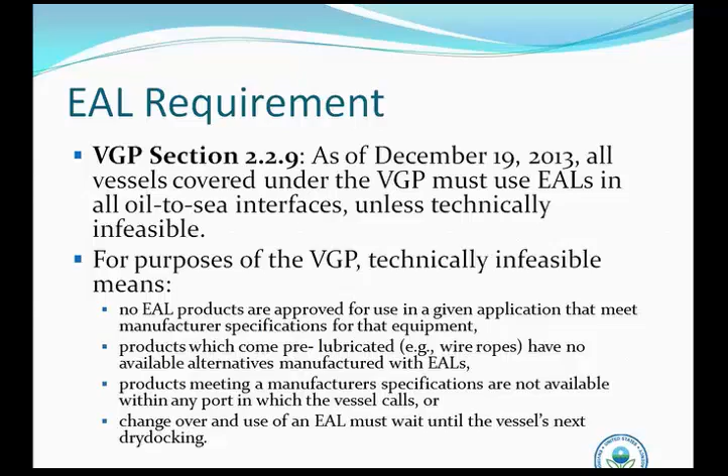So for the purposes of the VGP, technically infeasible means that there are no EAL products approved for use in a given application that meet the manufacturer's specifications for the equipment, or that products which come pre-lubricated, such as wire ropes, have no available alternatives using an EAL, or products meeting the manufacturer's specification are not available within a port in which the vessel calls, or that the changeover of an EAL must wait until the vessel's dry dock.

Really, the intent of this requirement is to reduce the environmental impact of lubricant discharges on the aquatic ecosystem by increasing the use of EALs for vessels operating within waters of the U.S.

So what is an EAL? An EAL is a lubricant that is biodegradable, minimally toxic, and not bioaccumulative. And all of these are defined in Appendix A of the Vessel General Permit.

There are a number of products meeting the permit's definition of an EAL, included in some voluntary labeling programs, which we've listed here. For example, Blue Angel, European Eco Label, Nordic Swan, Swedish Standard, OSPAR, and as we mentioned before, EPA's Design for the Environment Program, which we'll get to a little bit later.

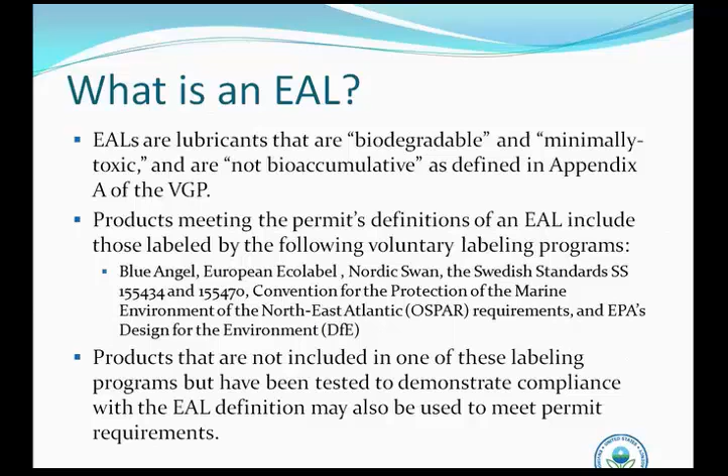Products that are not included in one of these labeling programs but have been tested to demonstrate compliance with the EAL definition are also able to be used, provided again that they meet the definitions that are described in the permit. Okay, next slide.

So what is an oil-to-sea interface? An oil-to-sea interface includes any mechanical or other equipment on board a vessel where seals or surfaces may release quantities of oil that are subject to immersion in a body of water.

In other words, it's equipment that's going to be coming in contact with water where there may be oil leaking into the water. We include a list of several onboard applications in the VGP, but there are also other applications that could apply. Generally, these are going to be things like controllable pitch propellers, thrusters, paddle wheel propulsion, stern tubes, wire ropes, and mechanical equipment subject to immersion.

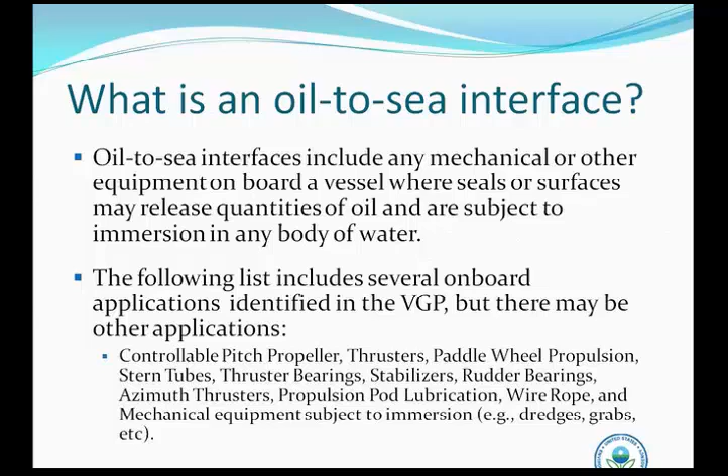We'll note vessel operators are not required to use an EAL on deck machinery so long as the equipment is not subject to immersion. In other words, it doesn't have an oil-to-sea interface. However, discharges from deck machinery are subject to other discharge requirements, such as those for deck washdown and runoff. This is a separate section of the permit under 2.2.1.

Okay, and for documentation and reporting, when you are using an EAL, it must be reported in your annual report, and documentation about the EAL must be kept as part of your record-keeping requirement. Again, intended to be pretty straightforward. When you're sending this to us in your annual report, we're looking for whether or not you're using a product from a labeling program, or if you're not using a labeled product, providing some information that the product meets the definition of an EAL. And that can come from any technical data sheet that shows it meets the definition, or an MSDS, something like that.

If you're unable to use an EAL, if you've determined that its use is technically infeasible, then the use of a non-EAL must be reported on your annual report, and documentation also kept as part of your record keeping for the vessel. Again, the documentation is intended to be simple, basic, and straightforward, and should include information on why the use was determined to be technically infeasible. For example, a general statement from a seal manufacturer can be used as sufficient documentation, or information, for example, if you have to wait until your next dry dock to install the new seal.

One thing to note, we are in the process of building our annual report system where you would submit this information to EPA, and that should be up in a few months. But the first annual report will be due to EPA in February of next year.

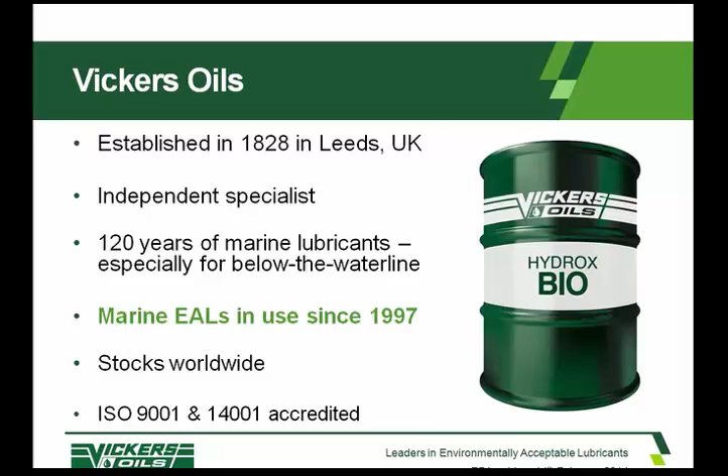We have four ranges of VGP-compliant EALs: stern tube and stabilizer bearing lubricants, hydraulic fluid, greases, and gear oils, primarily for thrusters. And importantly, we've now supplied approaching 2,000 vessels which have used our products since 1997. So we do have a lot of experience, both in terms of the number of vessels and the length of time in use.

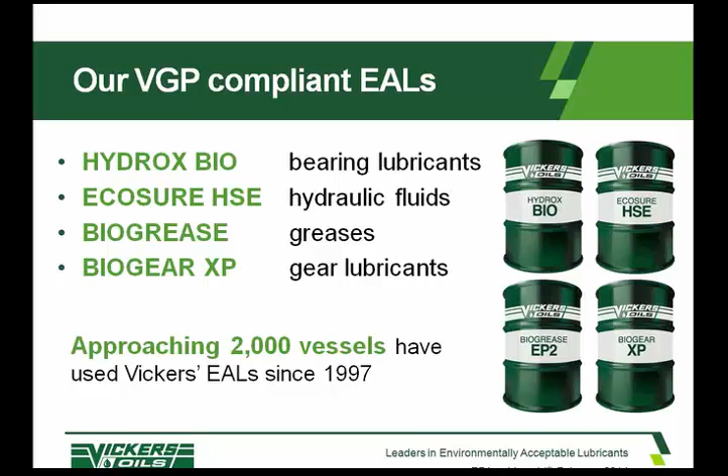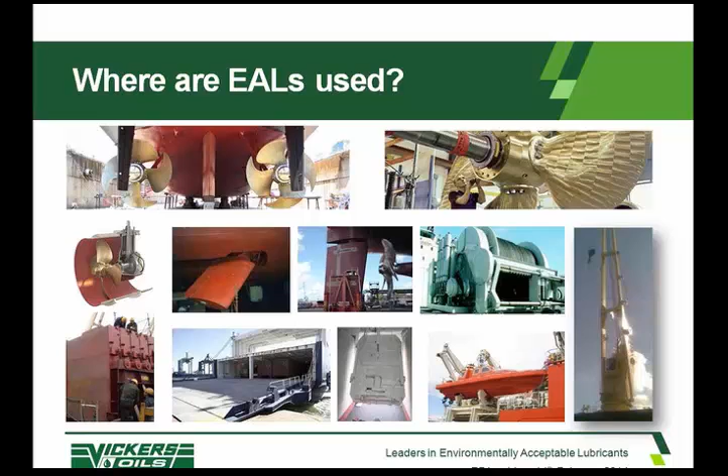This shows the main areas where our EALs are being used. The VGP-mandated applications are near the top of the slide: stern tubes, controllable pitch propellers, thrusters, stabilizers, and rudders. And as we heard, the VGP also recommends the use of EALs in other applications on deck or in the hull.

The VGP has already generated a substantial increase in demand for EALs from customers worldwide. Since last summer, we've seen a huge number of inquiries for information, as well as a surge in orders for both new builds and dry dockings. And in general, most users are well aware of the VGP requirements and are seeking to comply with them.

But there has been some confusion about the grounds for claims of technical infeasibility among both users and equipment makers. We have advised all parties not to rush into hasty decisions. It will be a gradual process to introduce these products and make sure that changeover is done properly. We've been preparing detailed recommendations for customers, considering each vessel in turn and evaluating each application separately.

So I want to turn now to those grounds for technical infeasibility, looking first at equipment maker approvals. Next slide, please.

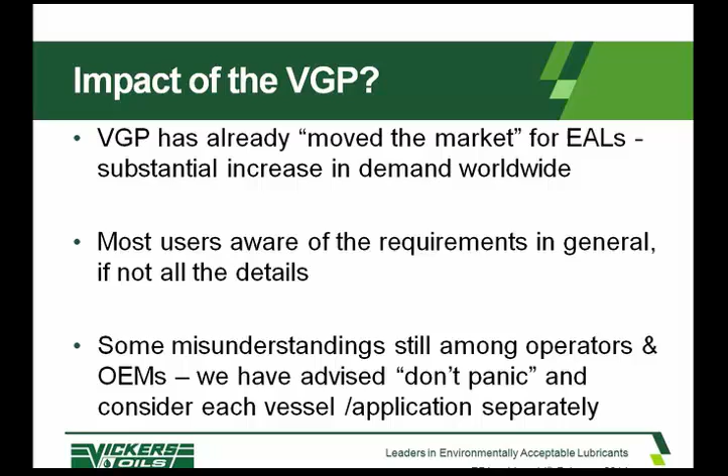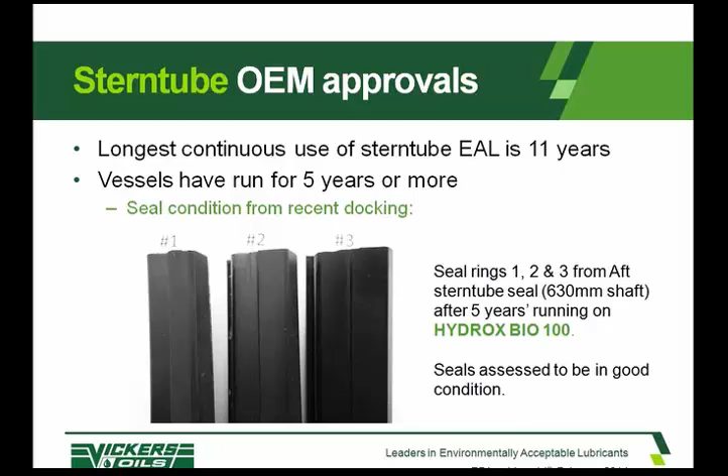As I'm sure we'll hear later from Pirjetta, stern tube seal makers have conducted a great deal of research and testing to ensure their seals are compatible with EALs and to determine the conditions under which they can accept the use of EALs for 5-year intervals. In light of their own testing, and after inspecting the actual condition of seals after several years' use, some stern tube seal makers are reducing their previous restrictions on the use of EALs. Others are introducing new elastomer seal materials with improved compatibility to EALs. So overall, for most conventional stern tube seal designs, it is now technically feasible to use EALs, provided that the appropriate elastomer type as specified by the seal maker is used. And Vickers Hydrox Bio is approved by all the major stern tube seal makers. And just a caveat for this and all applications, you should always confirm the detailed approval status and recommendations, both with the equipment manufacturer and with the EAL supplier.

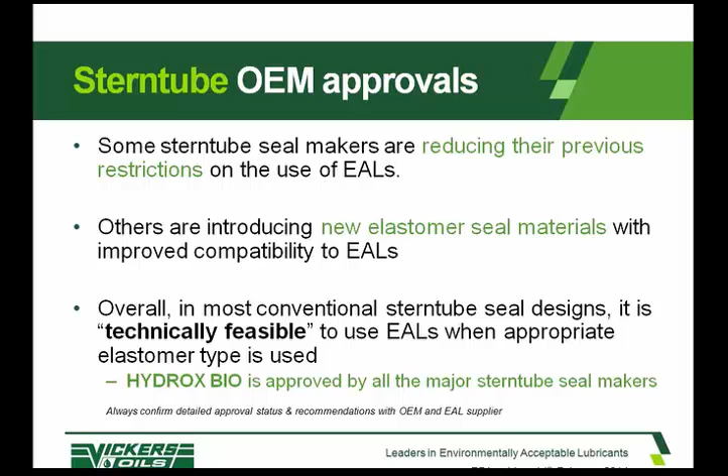Another major area of interest for customers has been grease. There are certain VGP applications, such as some CPP designs, some stabilizers, and in particular some rudder bearings, which are grease lubricated and where equipment maker approvals are required. Vickers BioGrease EP2 has gained such approvals, so its use is technically feasible in those applications. In some other applications, such as re-greasing wire ropes, OEM approvals are generally not required.

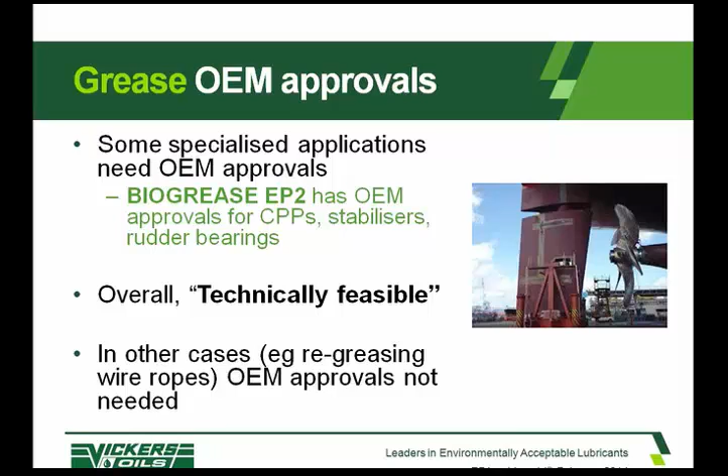The picture for controllable pitch propellers is a little more complicated, partly because the designs vary quite widely, and different designs, even from the same manufacturer, can require different types of lubricant. But some CP manufacturers have already given full approval to one or more EALs, including our EcoSure HSE. Other CPP manufacturers are still testing EALs or doing a desk evaluation. So overall, it is technically feasible to use EALs in many types of CPP, but you should always check the precise details and recommendations for each case.

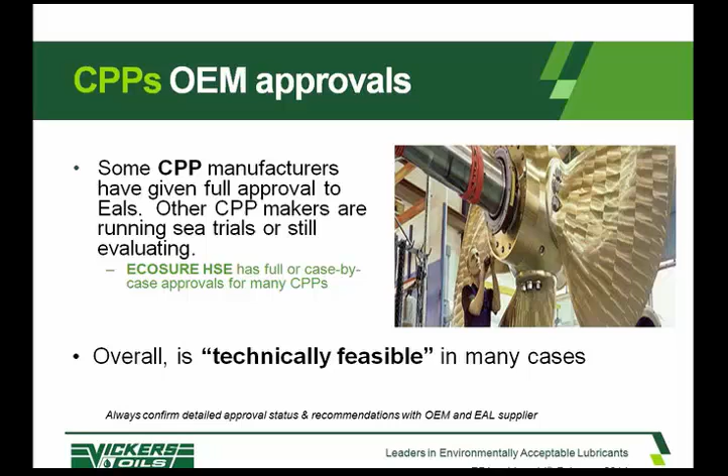Fin stabilizer manufacturers have been aware of customer demand for EALs for several years, so there are some long-established reference users. As most stabilizer manufacturers have now approved one or more EALs, overall their use is technically feasible, dependent on the model design and conditional on the installation of appropriate seals.

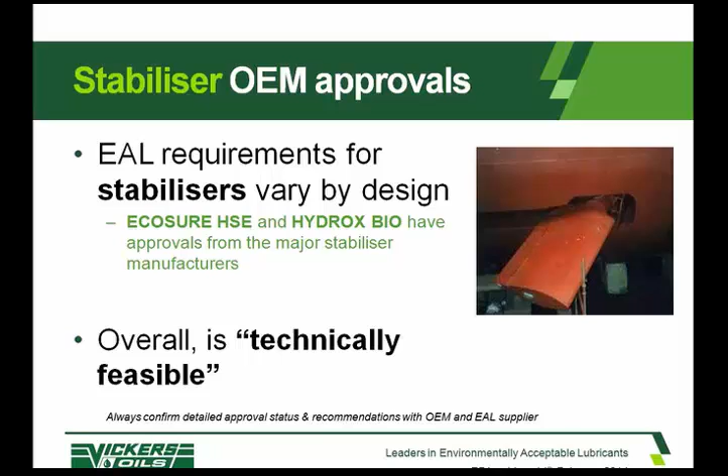However, thruster makers are generally taking a much more cautious approach. We think that's entirely right. There are very few, if any, thruster units which have yet run on EALs for 5 years. Thrusters are critical pieces of equipment, and risks should not be taken. That said, all the thruster makers have programs to evaluate and test EALs, and some have been running trials for a while. Our own product has been in multiple OEM supervised trials since 2009. But several thruster makers have issued letters stating that the use of EALs is at present technically infeasible.

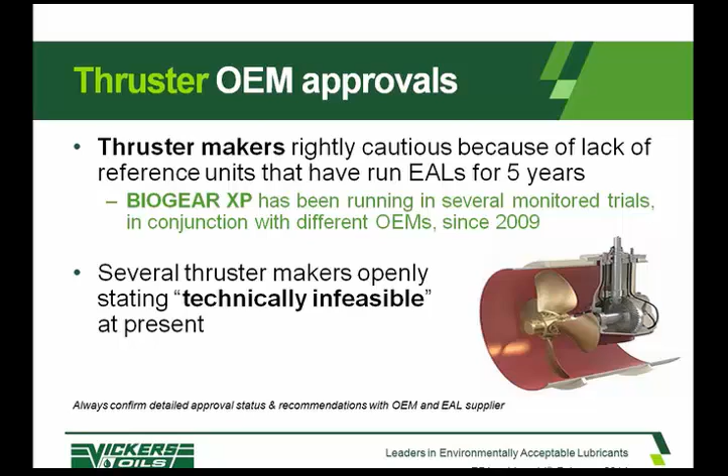Moving on to the second area of technical infeasibility, which is availability of product - an issue, of course, not just in the US but worldwide. Vickers is holding increased levels of inventory at key ports globally in response to the great increase in demand. And we believe that new market entrants will, over time, further widen product availability. So lack of availability should not routinely be a reason to claim technical infeasibility.

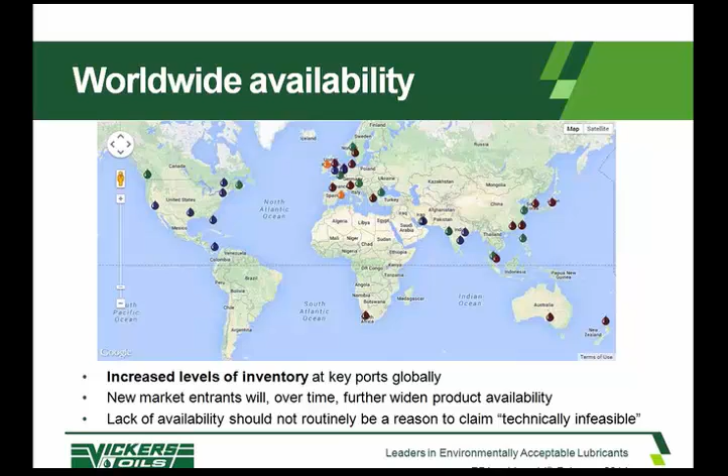The third ground for technical infeasibility is about changeover requirements and the need for dry docking. Vickers, in line with most equipment makers, recommends that changing over to EALs should happen in dry dock for below-the-waterline applications, in order to ensure you start with a clean, intact system, that EAL-compatible seals are fitted, and so as to minimize the carryover of the previous lubricant. But some above-deck grease applications can be changed at sea, provided that the existing grease is compatible with the new EAL grease. Next slide, please.

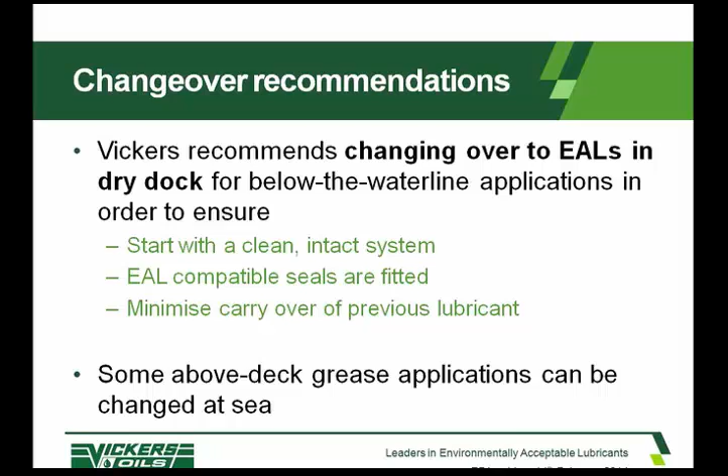Based on our experience with marine EALs over the last 17 years, we believe their successful use relies on a three-way cooperation between the equipment maker, the EAL supplier, and the customer. Each has an individual responsibility. The equipment maker can ensure that EAL-compatible seals, paints, and other components are fitted. The EAL formulator should use its expertise to ensure environmental demands are balanced with performance requirements. And the customer must maintain the EAL properly once it's in use. EALs are premium products and should be properly cared for. In particular, customers should pay attention to the instructions for use issued by the equipment maker and the EAL supplier, and should use an oil condition monitoring service designed for EALs, and of course should then follow the advice given in those reports.

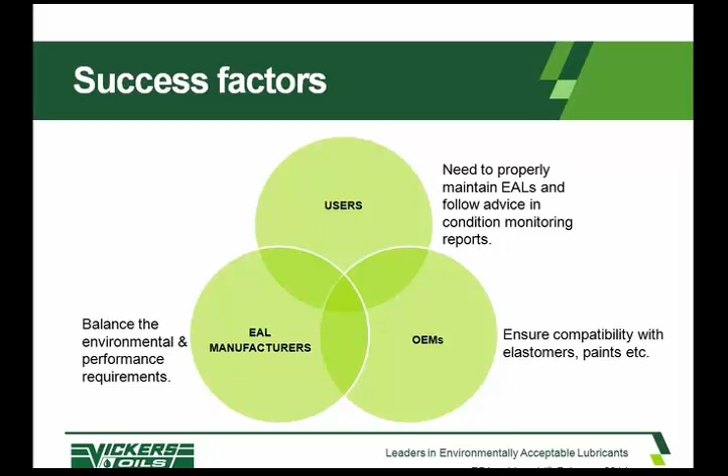So in summary, the use of VGP-compliant EALs is now technically feasible in many applications. Marine EALs have been proven in practice. They're compatible with system components and are approved by OEMs. They're readily available worldwide, and they're making a real contribution to minimizing the environmental impact of shipping.

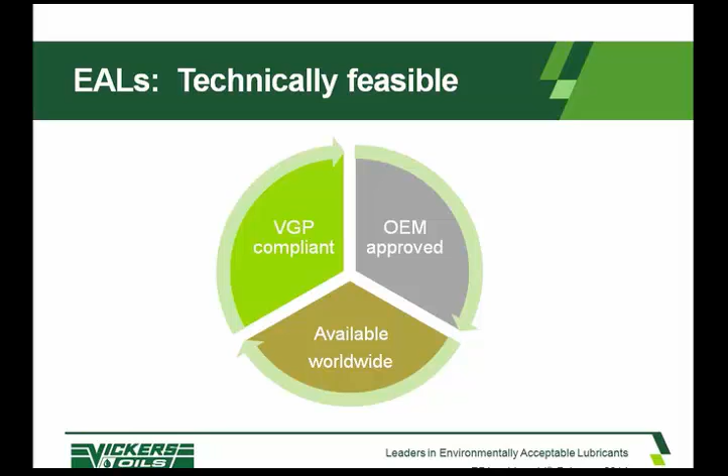If you'd like any further information, please see the dedicated VGP page on our website or contact us if you have any questions. Thank you very much for your attention.

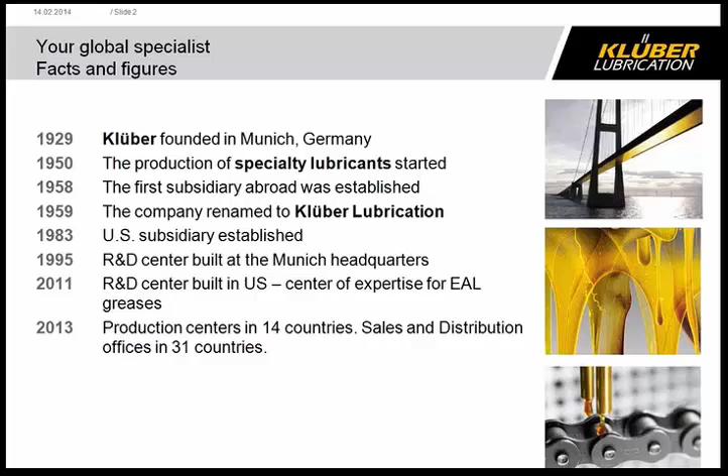So we have 2 R&D centers now, one in Munich, which has an extensive test bay for sophisticated testing of lubricants, and we've just created a second R&D center here in the U.S. where we will focus mostly on EAL greases to meet the needs of the VGP. We currently have production centers in 14 countries and sales and distribution offices in many countries. Right now, we service over 25 defined market segments with 3,000 different products. The marine industry is one of our market segments.

2 of the components of our strategy are research and development and a direct sales force. Of our worldwide employees, at almost 2,000 employees, 8% of the workforce is working in R&D, and about 50% of the workforce is working directly with the customers to solve their issues.

So for EALs, what is the Klüber offering? It essentially follows the same strategy that we've done with all the other industries. We work closely with manufacturers of the equipment to design specialty lubricants that meet or exceed the manufacturer's specification, with the purpose of maximizing the investment that the ship owner has made in their equipment.

Since the release of the vessel general permit and the requirement for OEM approvals, we've been working very closely with the OEMs on having approvals for our products. Thirdly, we do believe that the Eco-Label or EPA Design for the Environment or one of the other certification programs provide a third-party classification system that assures the customer that our products are VGP compliant.

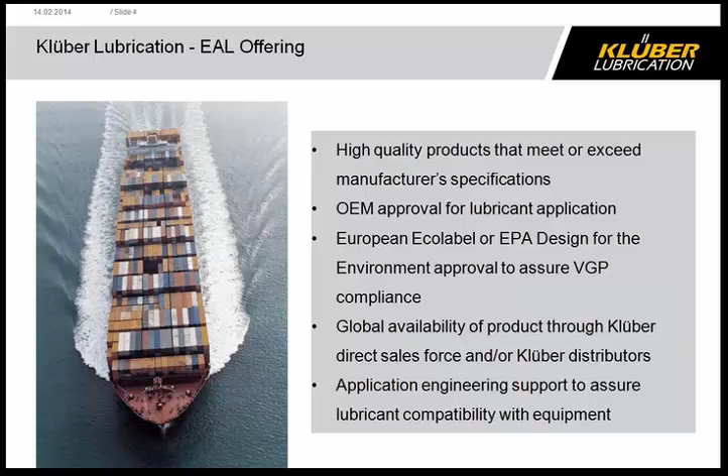All of our oils and hydraulic oils are certified by the EU Eco-Label, and our grease that I'll talk about is under review by the Design for the Environment. We do have global availability through our direct sales force and/or Klüber distributors. Finally, our value offering includes engineering support from our direct sales force.

The current Klüber portfolio for EAL products includes stern tube oils, thruster gear oils, hydraulic fluids, and a new product that we've just released focused on wire rope and open gears. In describing each of these products, we use the highest quality ingredients to get the best performance out of the lubricant. Our stern tube oil and thruster gear oils use high quality ester oils as the base oil, which are highly resistant to hydrolysis and other issues that would degrade the oil.

Our gear oil is formulated to protect gears against pitting and wear. Our hydraulic fluids pass all of the standard hydraulic fluid tests, and they have very good low temperature capabilities. All three of those product lines are approved or certified by the EU Eco-Label.

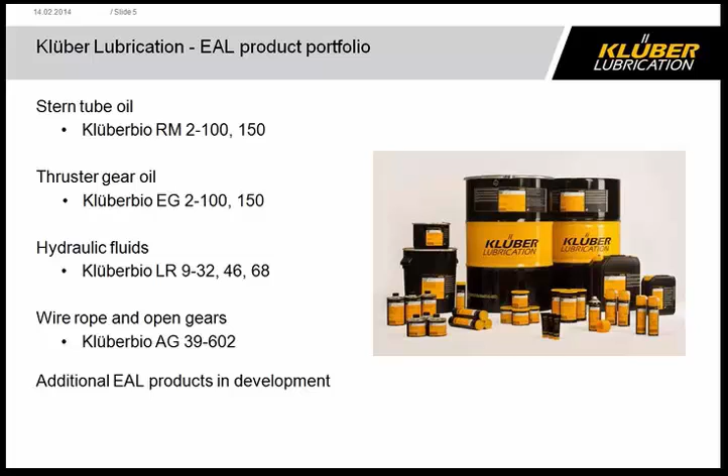The wire rope and open gear grease that we've just launched provides the customer with an excellent wire rope product that has excellent adhesion and corrosion protection. On open gears, such as jack-up legs, it has great anti-wear properties. But as mentioned, we do have additional EAL products in development, following our strategy of looking at specific applications on the vessel and developing a grease that would maximize the life of that product or piece of equipment.

So from our point of view, how is the transition to EALs going? Well, the first thing I would say is that it really is following the path that the EPA envisioned, and that it's a gradual transition. From my understanding, there was no requirement to transition over to EALs quickly. The need to transition really should follow the safety of the vessel and the OEM approvals.

So customers are taking advantage of this transition period. They're looking at their dry dock schedules and their OEM approvals to come up with a plan to transition their vessels. But I've also noticed they're using this time to educate themselves on the products and on the VGP requirements. When I first started talking to customers a year and a half or two years ago, there was very little understanding of what the VGP requirements were, and that has changed dramatically.

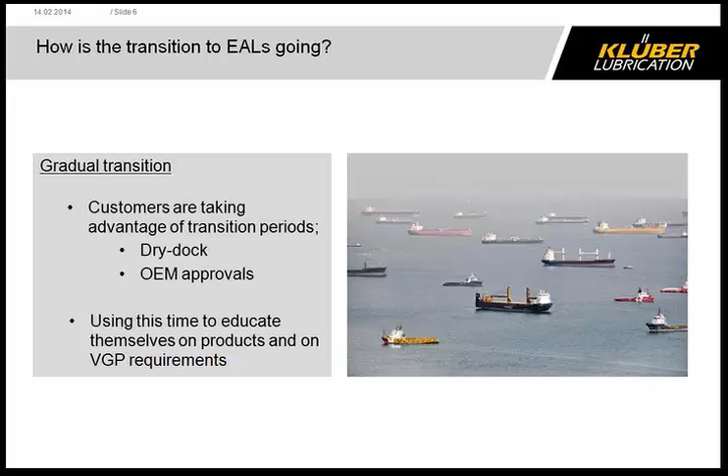The other thing that's changed dramatically is the people I'm talking to. A year and a half ago, I would have been talking to the compliance people within each of the companies, and now that has moved much more into the operations of the vessels. So we've seen a transition of knowledge to the operators and out onto the vessels.

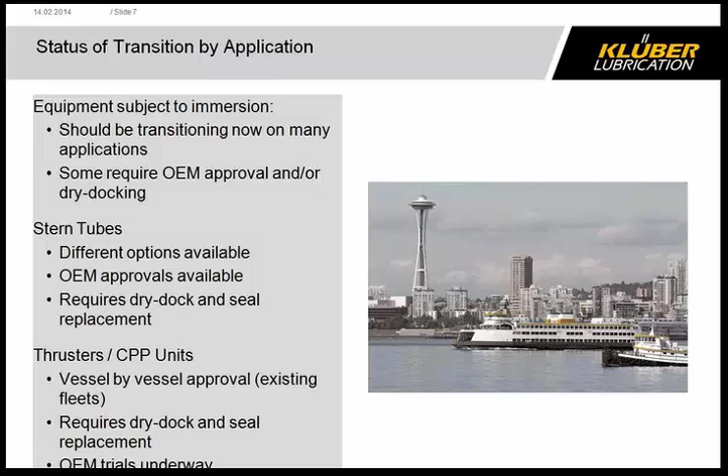The thrusters, as previously mentioned, and the CPP units are a different story. There's a real need to test the products available to make sure they meet the requirements of the thruster units. The load on thrusters is quite a bit higher than on a propeller shaft, so there's a need to put these products into trial and determine which will meet the long-term requirements of the thruster manufacturers. There are many OEM trials underway, and we're taking part in some of those. We do have some initial approvals, but for the most part, customers are relying on letters of non-feasibility in the short term.

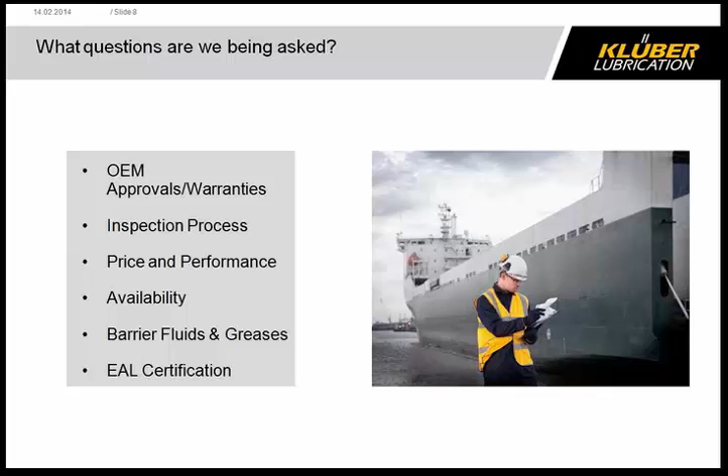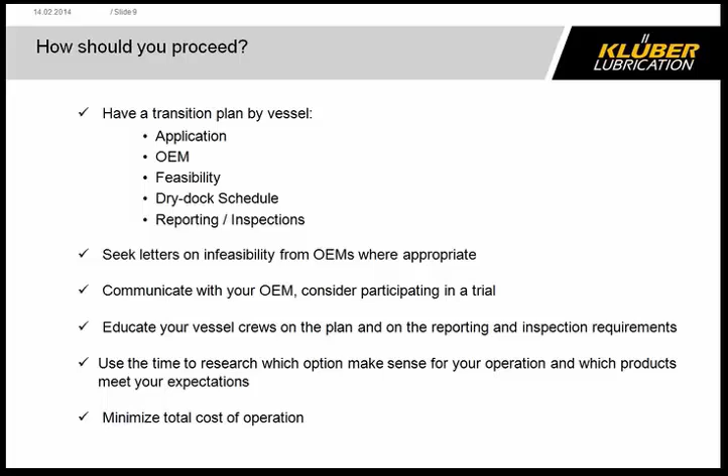Consider participating in a trial. There may be savings for you, and OEMs are looking for opportunities to conduct trials. Educate your vessels and crews on the plan, since they're the ones talking to the Coast Guard during inspections, and use this time to research the options that make sense for your operations and which products meet your expectations. Lastly, as you do your analysis, look to minimize the total cost of operation over the equipment's lifespan.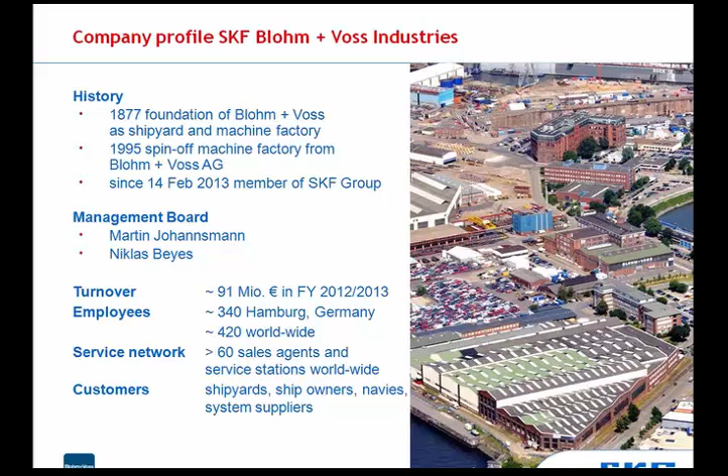When we talk about VGP 2013, we focus on the stern tube components and how the new rules affect our seal technologies. With the new VGP rules, it becomes mandatory to use EALs at all oil-to-sea interfaces unless technically infeasible. We offer technologies to fulfill the stringent EPA requirements and protect the ship with its crew. Let's start, next slide please.

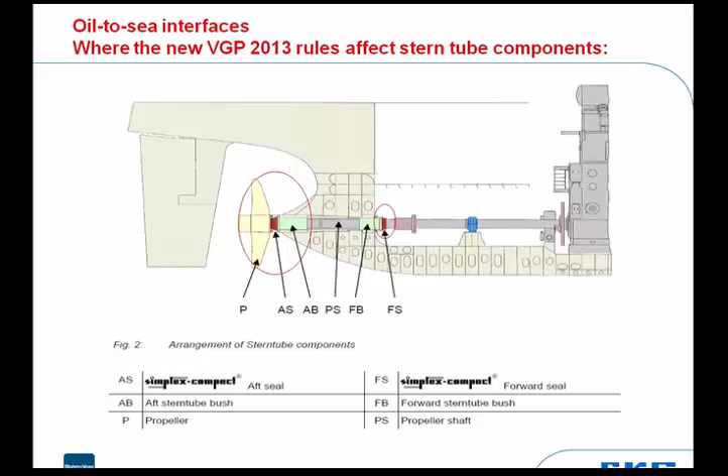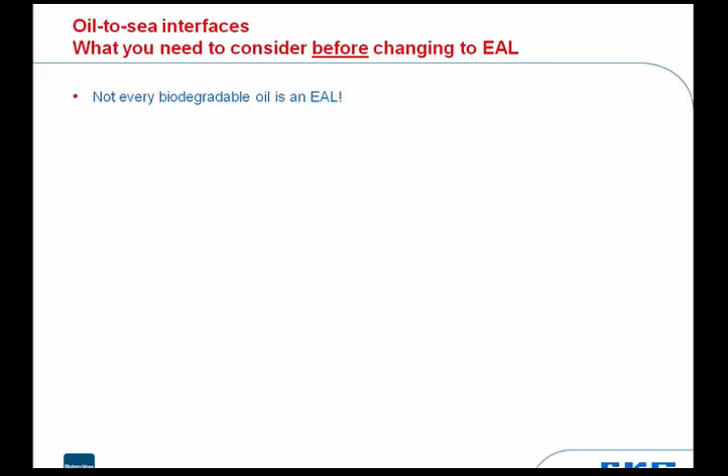First, let's look at what you have to consider before changing to an EAL. We already learned that not every biodegradable oil is an EAL. The problem is that biodegradable oils or EALs can chemically affect the sealing rings, especially through hydrolysis. This means the lifetime of the seal ring material decreases, and we risk having shorter dry docking periods, even less than 5 years, with a risk of sealing failure. Biodegradable lubricants are not suitable for all sealing ring materials, and that is very important.

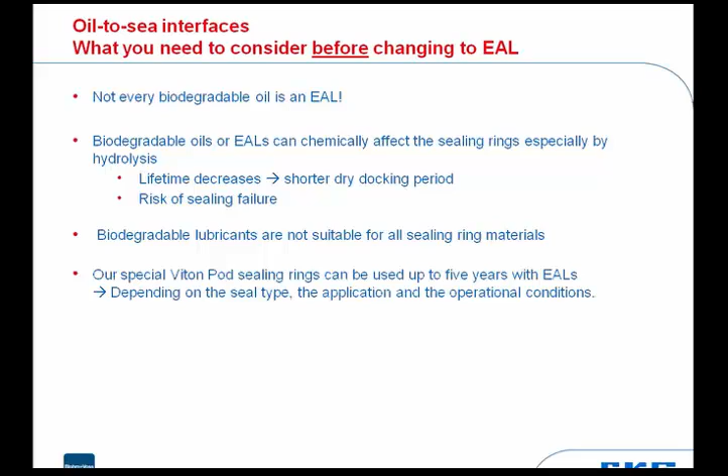But we provide a special Viton Pod sealing ring material, and this material is compatible with EAL. We have gained experience for more than 10 years with this special material in the market, and we can use it up to 5 years with EALs. This depends, of course, on the seal type, the application, and also the operational conditions.

Before using an EAL, it's very important to check if it's approved by us. We have a big R&D department who carries out extensive tests for all the given applications, and you can find the results on our latest EAL list on our website. We will update this continuously because the number of EALs is also increasing.

Last, very important point is also that you have to avoid intermixing different oil types because of unpredictable chemical effects on the sealing ring materials. So you cannot use one sealing ring material and switch between the oils. This has to be checked also with your oil suppliers and/or with the shipyard on how the switchover can be done. So we've seen in Peter's and Ben's presentation that it should probably be done during dry dock.

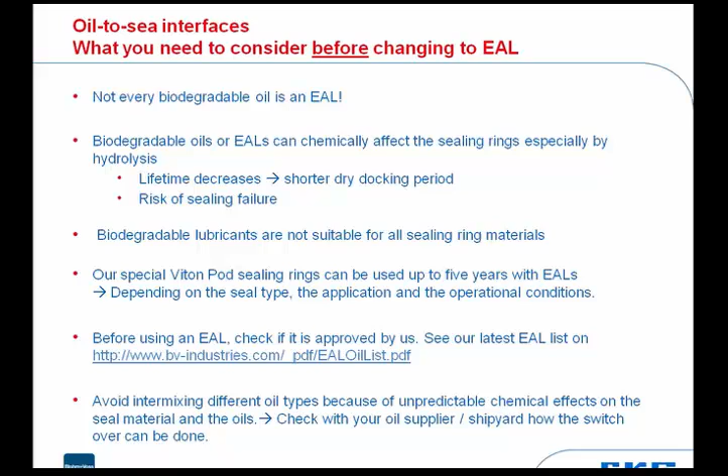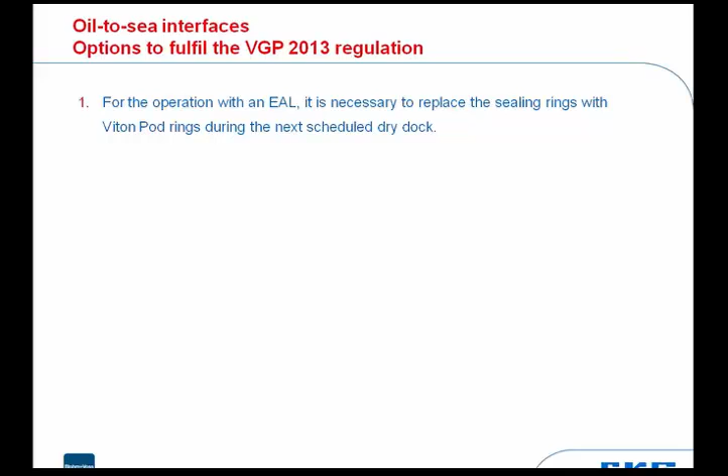In general, there are two options on how to fulfill the VGP 2013 regulation. For operation with an EAL, it is necessary to replace the sealing rings with our special Viton Pod rings during the next scheduled dry dock. In addition, we can issue a statement that the existing simplex seal is technically infeasible with the use of EAL. This statement you have to keep on board starting from last December, and it is also part of the annual report to the EPA.

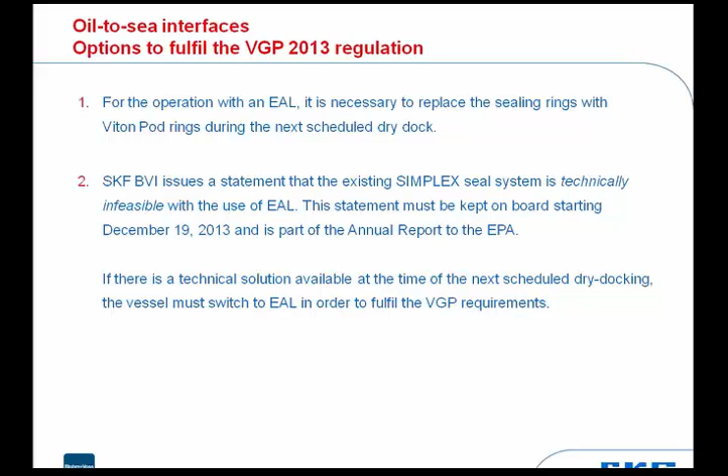Important is that if there is a technical solution available at the time of the next scheduled dry dock, the vessel must switch to EAL in order to fulfill the VGP requirements. Next, please.

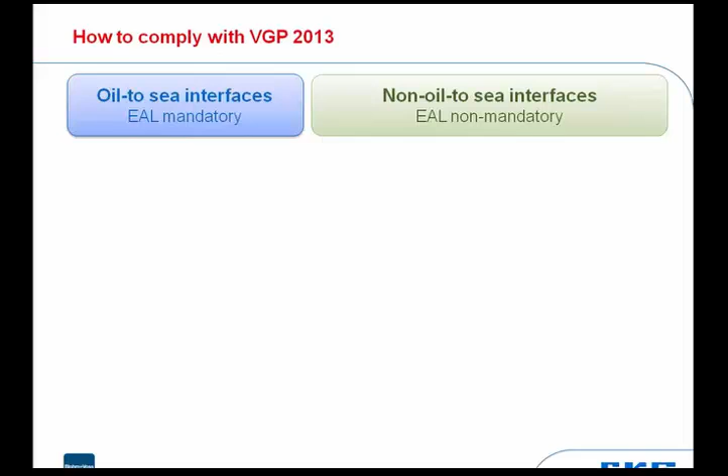Now let's talk about some detailed sealing technologies and how to comply with VGP 2013. I would like to start with the oil-to-sea interfaces, then I'll move on to the non-oil-to-sea interfaces.

As you can see here on the slide, EAL is mandatory for all oil-to-sea interfaces, and the EPA requirements concern our conventional seals, but also in addition the cathodic protection. Here we offer a special sealing ring material, the Viton Pod, as well as an aluminium anode. Next, please.

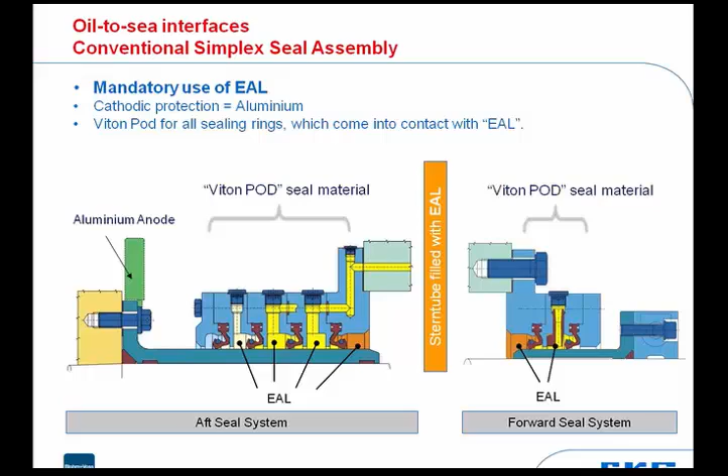As an illustration, I give you here a drawing of our conventional simplex seal assembly. You can see the use of EAL is mandatory for the conventional seal, and you have to select Viton Pod for all sealing rings which come into contact with EAL. Important to know, this doesn't only concern the aft seal, but also the forward seal. All sealing rings which come into contact with EAL have to be made of Viton Pod seal ring material. Next, please.

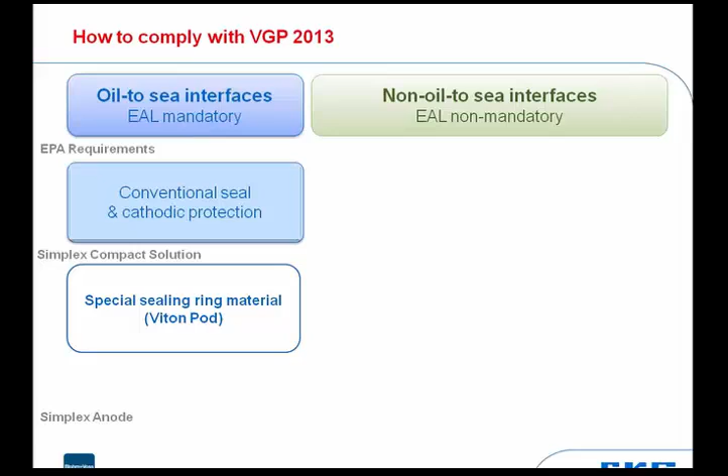Let me turn now to the non-oil-to-sea interfaces. So non-pollution air seals, which fully eliminate any oil leakage under normal operation and therefore cease being an oil-to-sea interface, can be considered as VGP conform. So it is very important that there's no leakage.

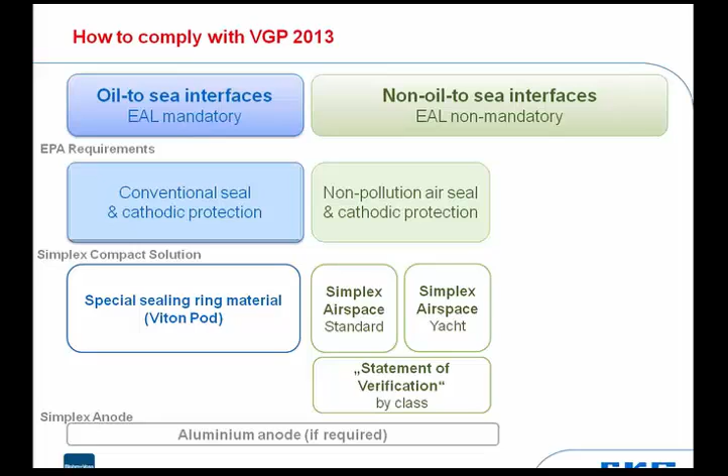So here we work closely together with one of the major classes to get also an additional statement of verification. We are also in continuous contact with the class and the EPA to finalize the procedure on how to provide the ship owner with such a statement. Next slide, please.

We move on with our simplex airspace. Here, the key factor of our non-pollution seal system is the air chamber. Because we have a perfect separation of water and oil by this dedicated air chamber, it will be considered a non-oil-to-sea interface. So here, no EAL is required. You have no oil leakage into the seawater, and it's a perfectly environmentally friendly non-pollution seal system.

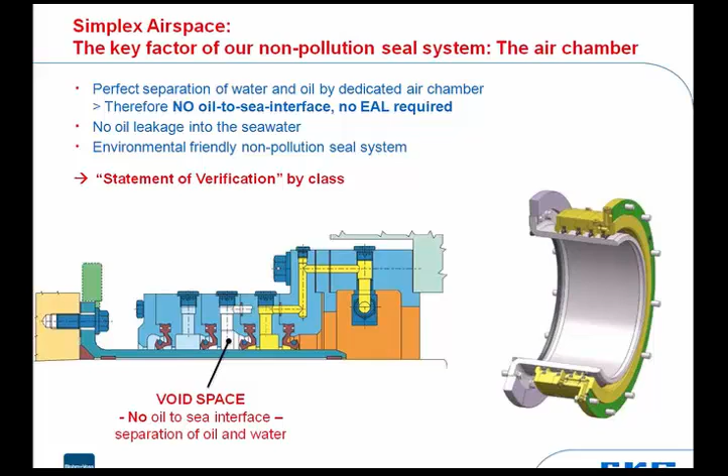So here you can see we prepared another drawing showing the main characteristics of the non-pollution simplex airspace assembly. We have filled the oil chambers with standard mineral oil or with the preferred oil of the ship owner. Here we can use standard sealing materials, there's no need for special sealing materials. The cathodic protection has to be made of aluminum, however. So this is a perfectly seal solution, also in compliance with the VGP 2013.

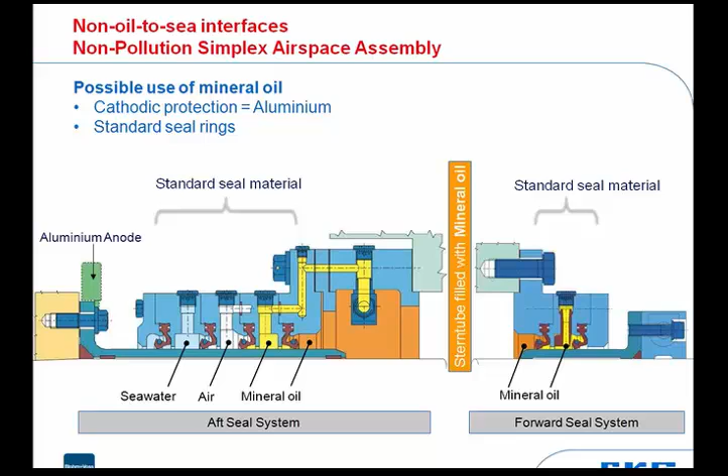And we're already at the end of our presentation. There are also water lubricated seals in the market, and you can fulfill also the VGP requirements with them. We provide special water lubricated seal designs and water lubrication systems. You can choose between a Simplan face type seal or a simplex lip type seal. So in conclusion, we can offer you proven seal technologies depending on the individual requirements of the ship owner for environmental protection and, of course, for safety of the ship and for safety of the crew.

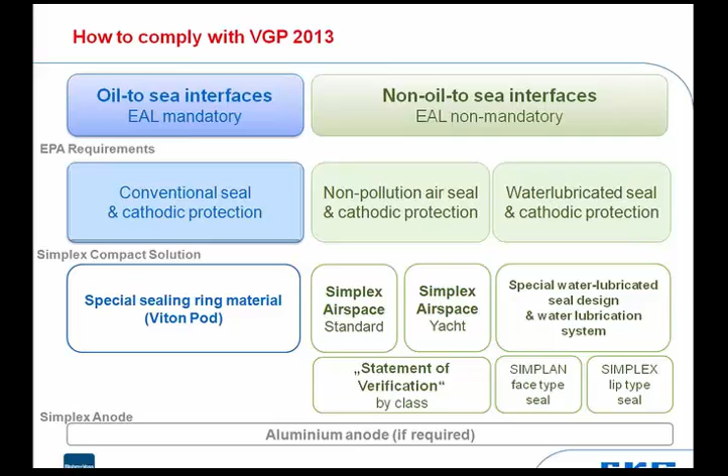For further information, please feel free to ask us after this webinar, and of course we will be available for any questions afterwards as well, so feel free to contact us, me or my colleague Christian. Thank you very much.